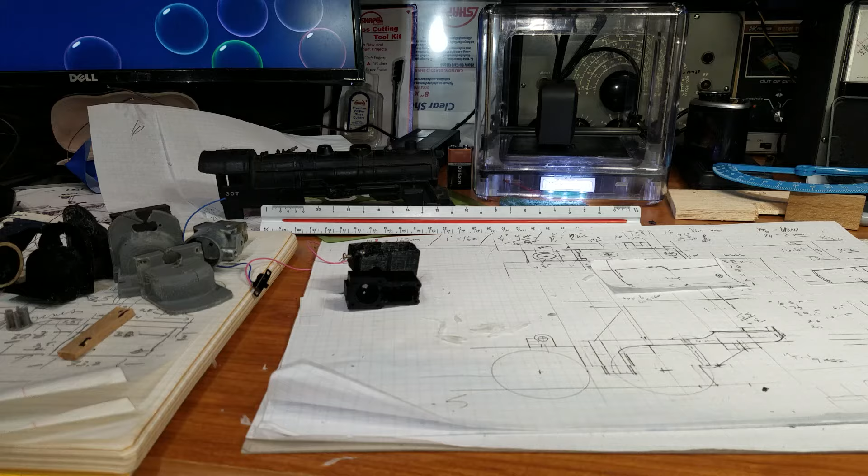Well, today was a strictly engineering day. I was getting desperate, and I had to get to a point where I felt like I was doing something.

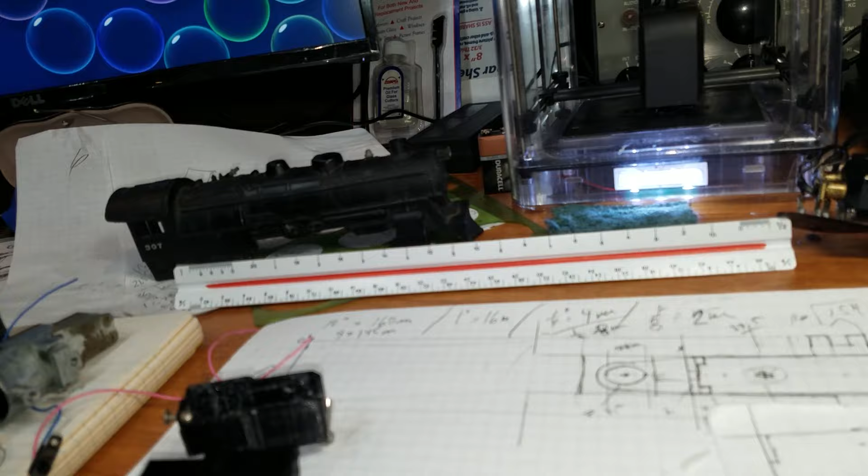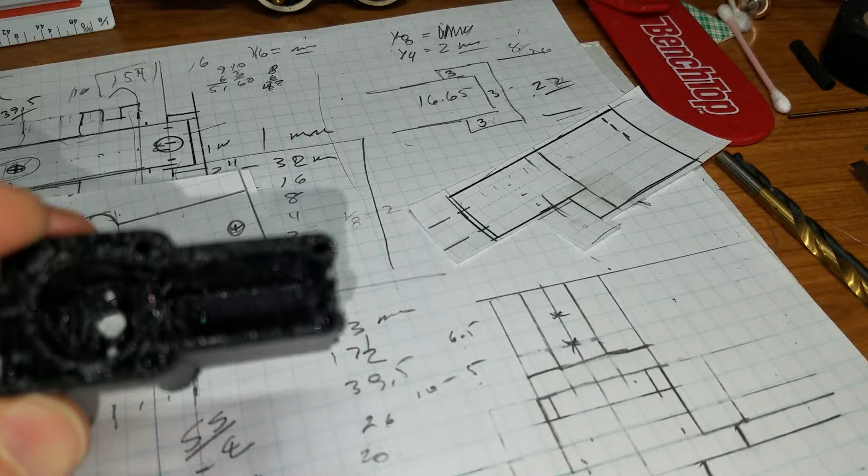So I had this, just came off the printer. I don't know if I'm focusing very well or not, but at any rate, it's got all of the pieces in there: the mounting screws, the holes for the smoker. I've enlarged the holes for the lid. I didn't print the lid yet, and it cleaned up pretty nice.

I am not at all happy with this material because it's so glossy, but it seems strong. I'm squeezing it and it doesn't move.

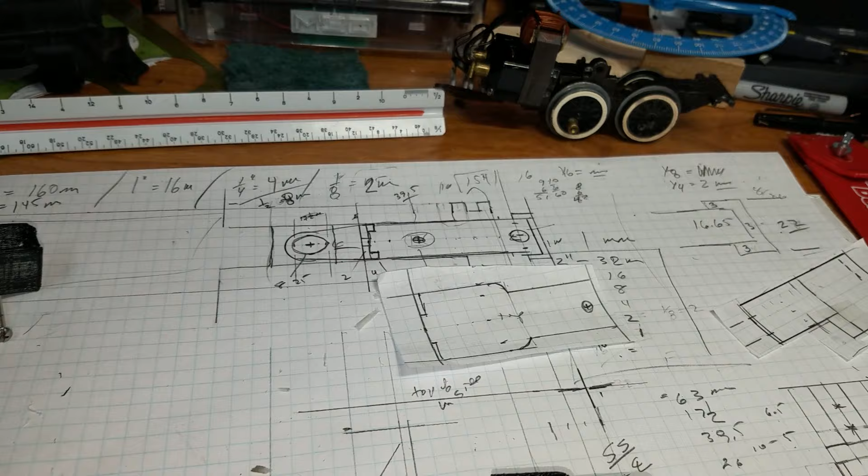There seems to be plenty of room for the heater and the smoke. I can't see through the camera and do anything.

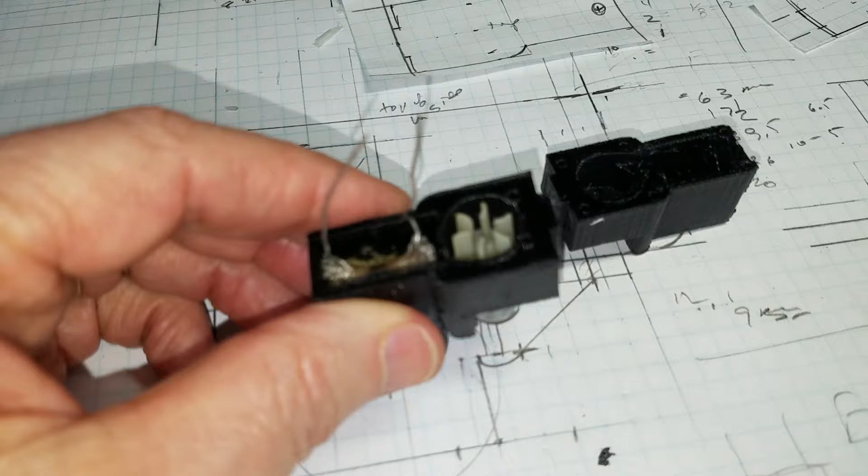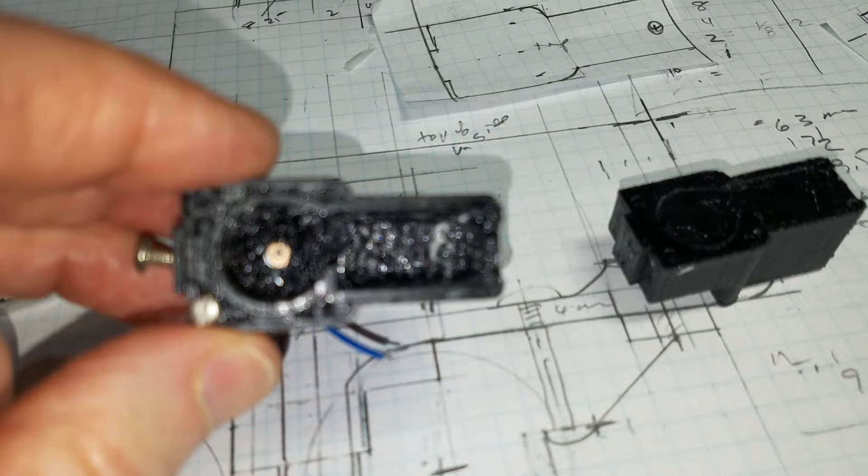And I showed you yesterday how we can, or I don't know if I did or not, but at any rate, there is a test box I made here the other week. This was another test box that I built to verify some things, and I just glued a motor on. Didn't have the screws, so I just glued the motor on. It's funny, it still runs, to try to get a fit. How will this run, or how will this look in this engine?

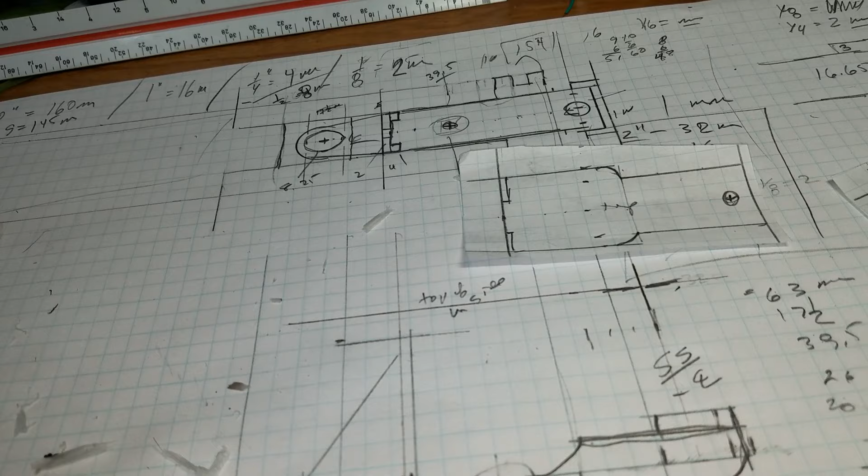And I went back and forth and back and forth, and finally I just went back to my absolute first job in mechanical engineering, where I worked with some Danish engineers, really wonderful people. Torkel Jensen from Denmark was just a great mentor for me. At any rate, we took to making scale drawings, oversized drawings.

So I did that. I made a scale drawing of the chassis. It's one square equals two millimeters, so I measured it in millimeters. I draw it out in the squares, and then I get a better visualization with that.

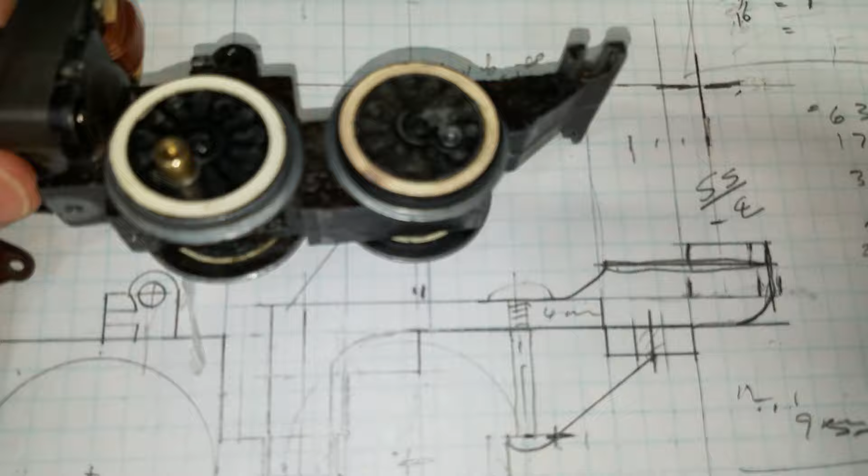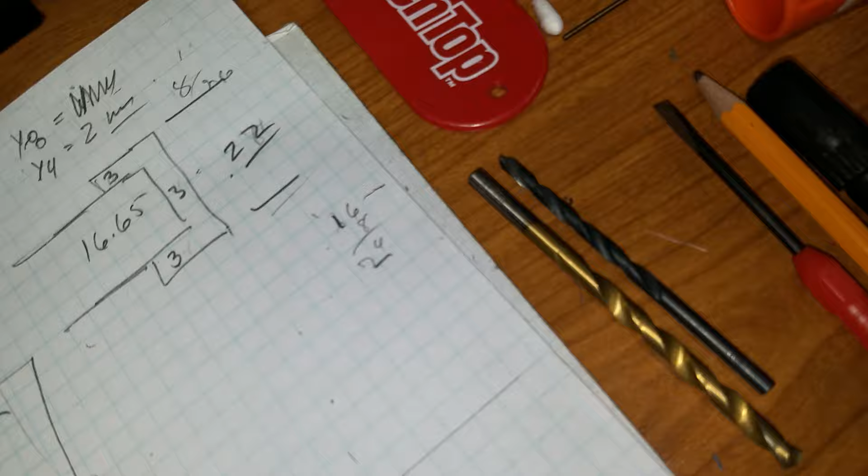And then I did the side view the same way. So I put in all of the dimensions I can get my hands on, and I converted them from inches to the scale, and then put them metric to scale, put them down on the paper, and then I do my isometrics. This is a front view, and this is a side view, and that's a top view.

And I transferred the numbers over, and then I needed a scale model of the smoke, so that's what this is. This is that scale to show you what the differences are. And so then I could set this on here.

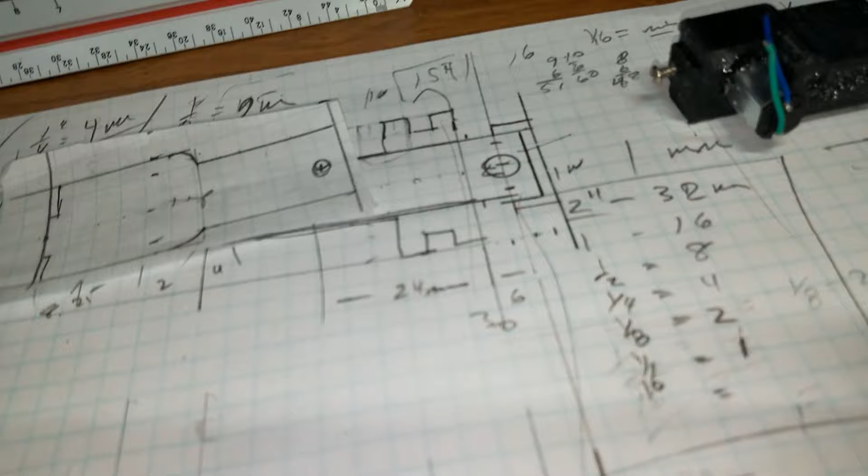I could kind of line it up and see where it was going to fit, and how I would have clearances for the motor, and where the motor would be relative to the screw. And it was getting a little scary, but I think I have it now.

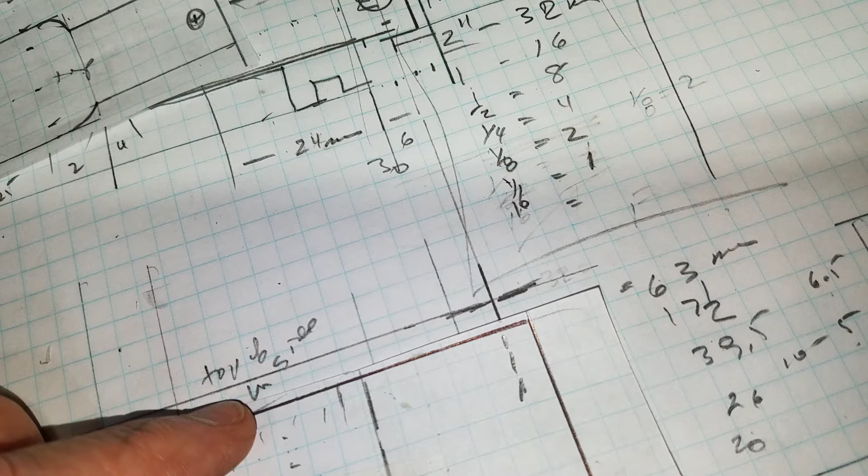I bring the screw in. I don't put a nut on it. I keep it flush. This thing can come down flat. This is going to be 4 plus 4, so that's 8 millimeters high. It's going to have a little 1-millimeter wall around the front, like the toe of a shoe. So the front end of this thing is going to just slide.

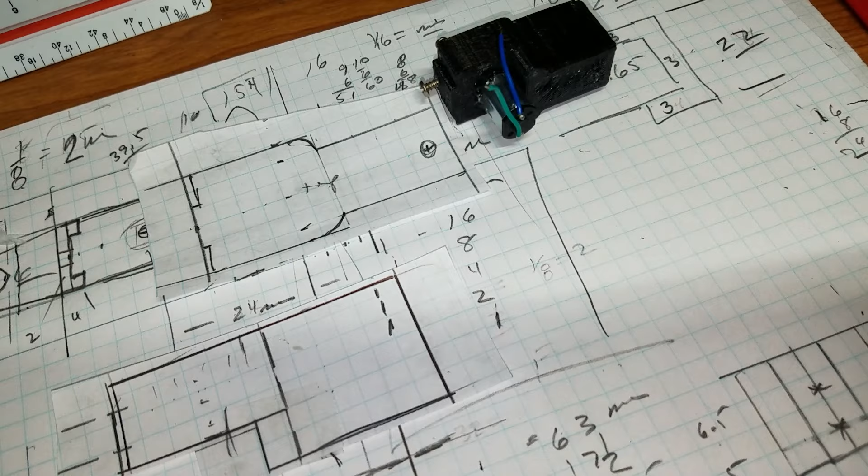Oh, I'm way up here. It's going to slide right in, and then it's going to set down in a notch in a support, and this support is going to stick way up. I know it sounds crazy, but it's going to stick up.

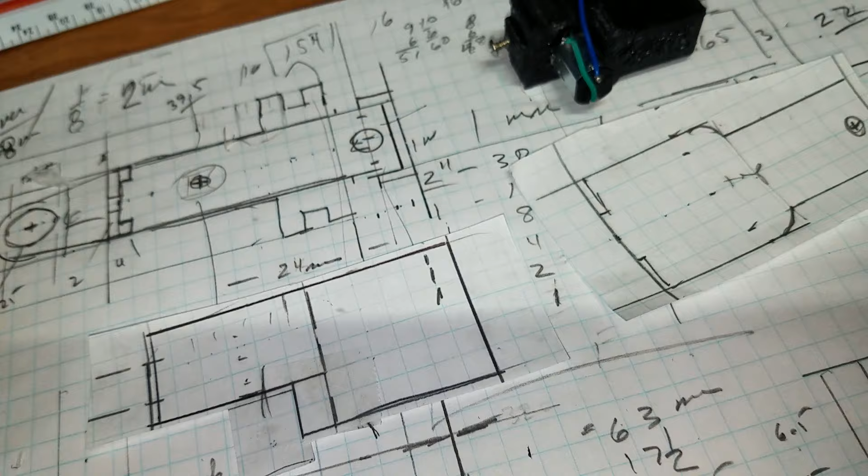I'm making a sample of it. If it works and all of that, I'm going to put a gusset in here so it'd have some reinforcement. I needed alignments, so I've got this screw hole for an alignment, and I also have this cavity. It's just another hole, there's no hole in it, it's just a cavity. But I'm going to use that.

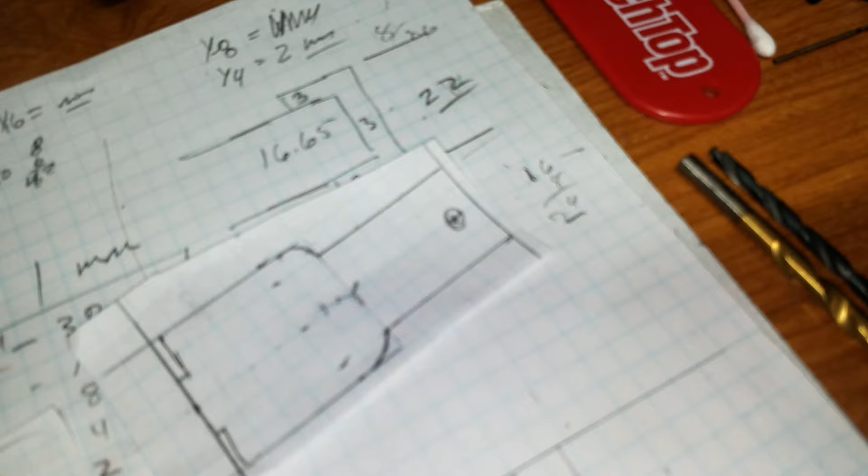I'm going to put a dowel-like pin in it, a piece of plastic. It's going to slide down in here, and then that's going to center it. And then I put the screw in, and that's going to stick out over this nose a little bit, and then it's going to have this little toe-like thing, and that's going to hold the smoke. The idea is the smoke will sit up high, and we'll clear that screw, and it'll be bolted back here, and nudged in there.

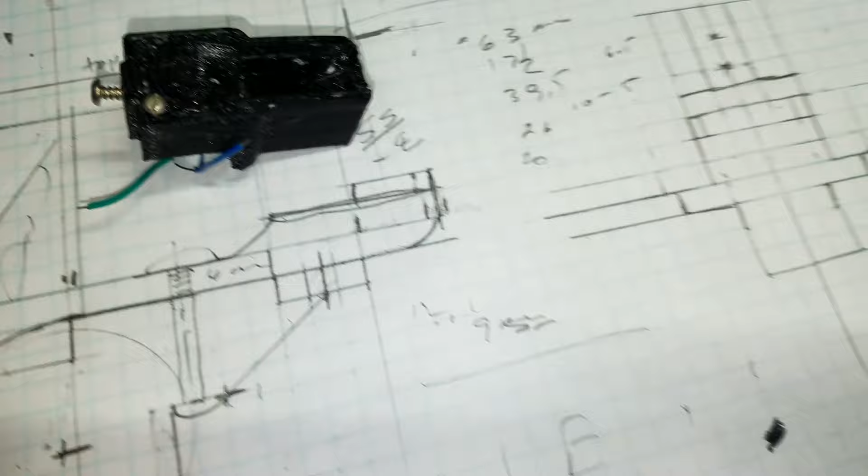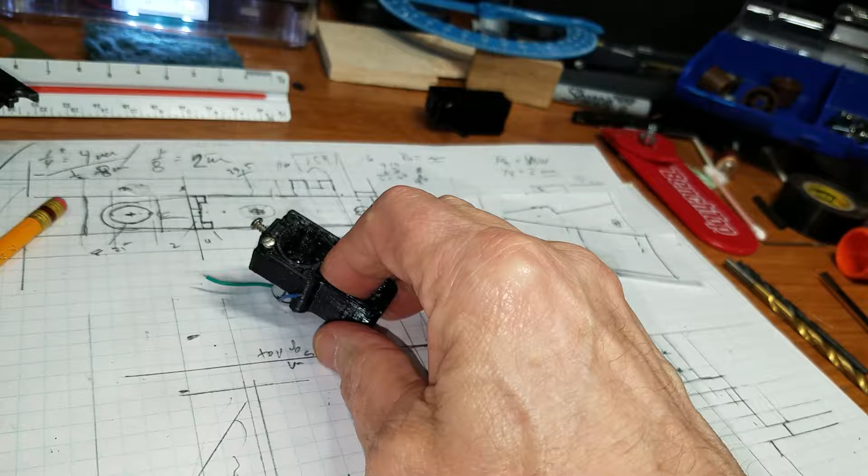When I set all this together, that's the alignment for the smoke hole. This smoke hole is going to be right near the edge, right where it wants to be, and that's the idea anyway. So from all of this today, I made no modifications to the smokehouse. It's as good as I can get, and what I may do is send it out to get it printed by somebody with a better machine. Right now I just don't have a good enough machine, and that's not anyone's fault, just the way it is.

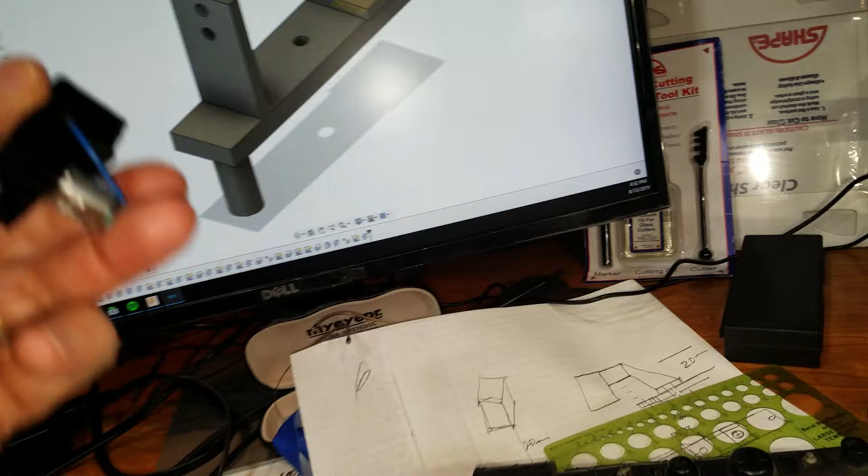Now, the part that I'm getting made right now looks like this. Oh God, I know, it's like, what is he doing? The smoke, it's not to scale, right? So the smoke is going to be in here. That's like the toe of the shoe. It's going to be bolted in back here, right?

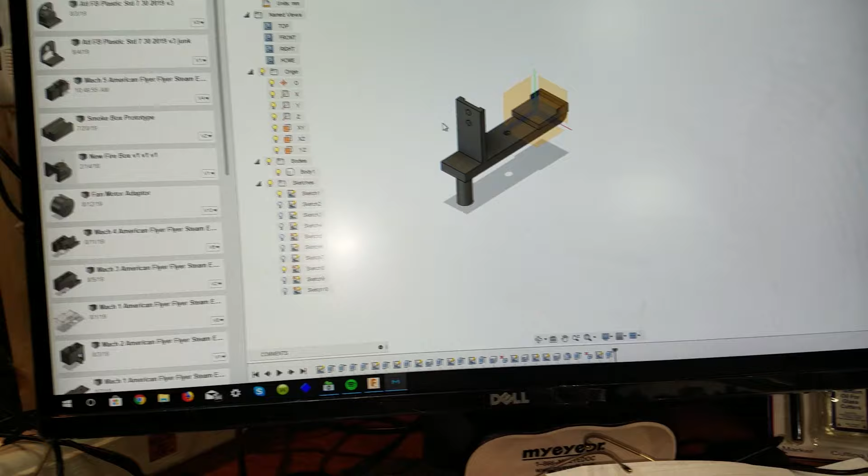I don't know if I can do that. Do you think I can scale that down? That would be funny, wouldn't it? I'll bet I can. Look at that. Okay, let's try this. Now, there it is. That's what it will look like, just like that. Oh, get away so you can see it. Get my hand out of the way.

So it's going to sit there. It's going to sit in there like this, right in there, and then the notch in the back, it's going to slide down and screw in. And so if I just go to a straight side shot, let's see if I can do that. It's usually called the right side. Bingo. There it is. Not quite small enough, but you get the idea.

About like that. About like that. Oh, I'm not too close. You're too far away. Whatever. But it's going to be about like that. Anyway, we'll see. Okay? I'm printing it.

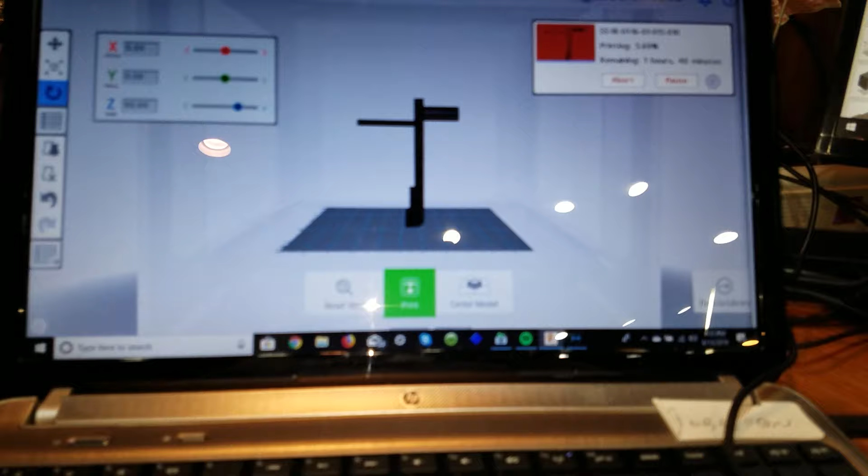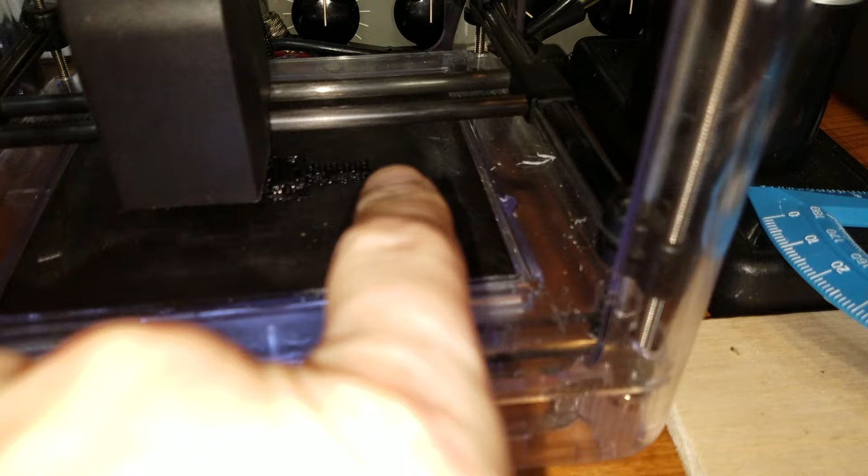I know it looks like hell in here. How's that? That looks like it's just going to fall apart, but I've told it to put in struts and hold those up while it's printing. And it started out, and you can see there's one of the struts it's putting in, a little support piece. See it? And that's going to be for the other part, and that's going to be for the other part. So it's putting supports in, and it's going to build all of this up.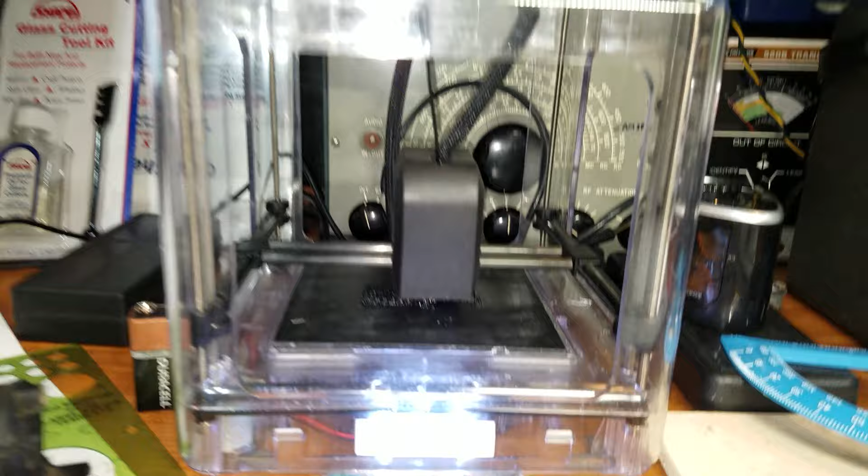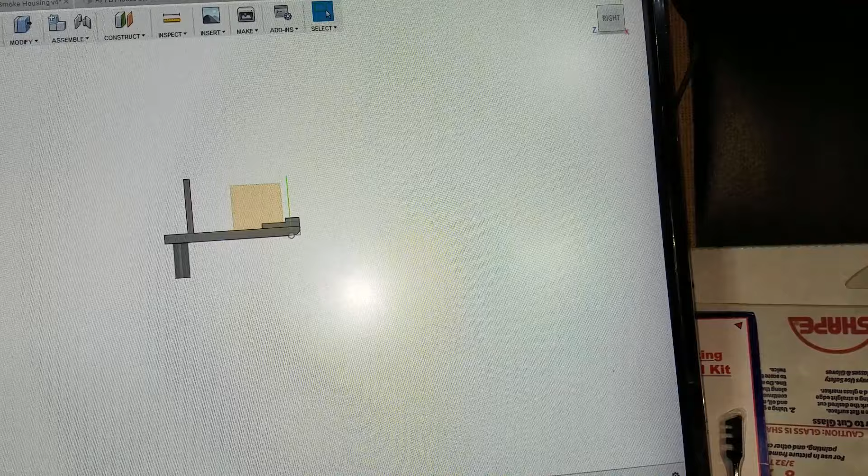It's going to be huge. It's going to look like a mess. But then the supports are thin and hollow, so you can break them off real easy, and then you should have left the part you want. Now, I don't know, I've never done it. This is just a goofy part. I've never seen anything or done anything quite this outrageous without a lot more support.

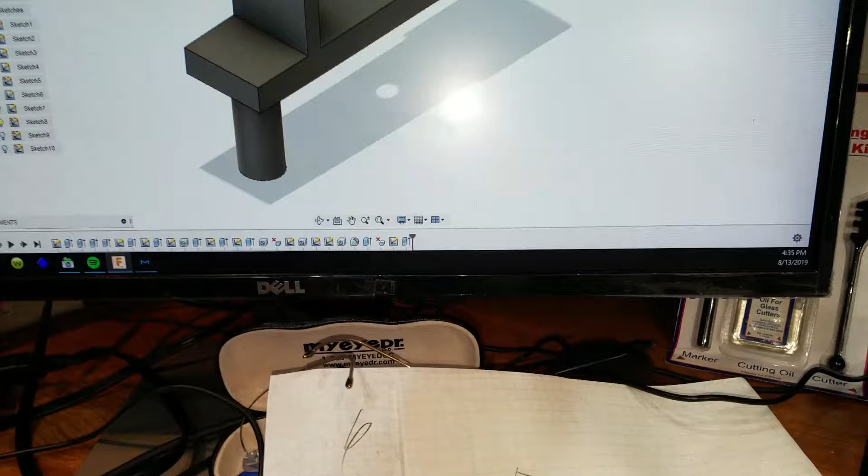But that's where I'm at. That's what I did. I don't know why. I think it'll work. I think it'll work. The nose will fit in here. There's clearance for the motor, which sits down a little more than the nose. Boy, it looks like that might not be high enough. Oh God.

Well, like they used to say, that's why they have erasers. Well, that's why we have the redo and delete and go back and undo buttons. So we'll see how it turns out.

Anyway, that's been the entire day, and it's 4:30 already. I just can't believe it. I started this, I just kept going and going, and I got it all to scale. I felt really good about the design.

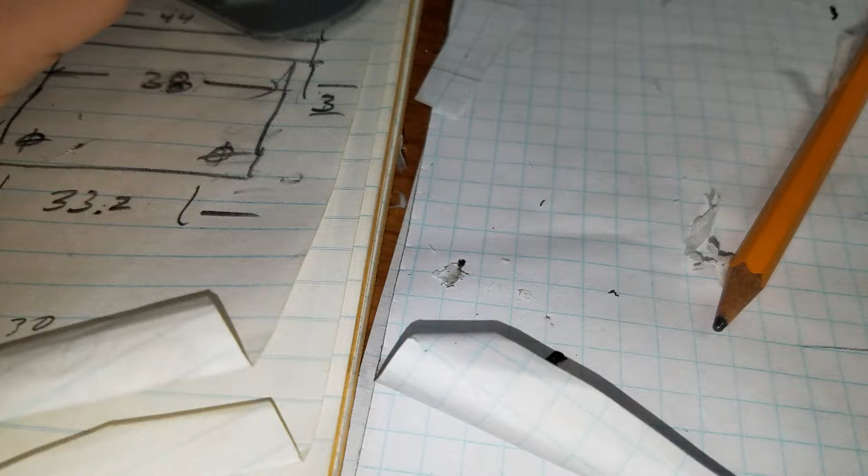Actually, what I was gonna do was work on my smoke. I started to do all this for the smoke, and then it just sort of got sidetracked. As soon as I saw I was getting close printing with the firebox, I thought I was gonna do the firebox, and then when I saw I was getting close with the smoker, I said, oh, I better focus on that.

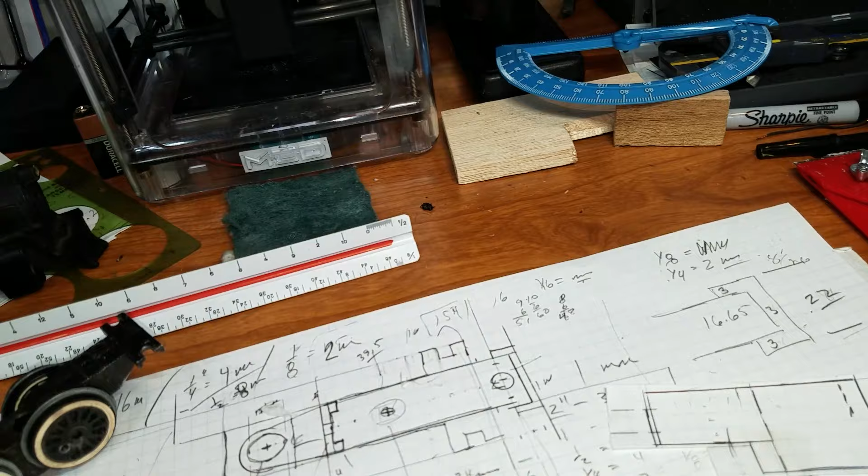And what I wanted to build was the lid, and I didn't even do that. So here we are. Is this ADD or not? I don't know, but we will see how precise this stuff can really get. And it may not, it may not be. We'll just see. There it is. That's my day. Later. Bye.